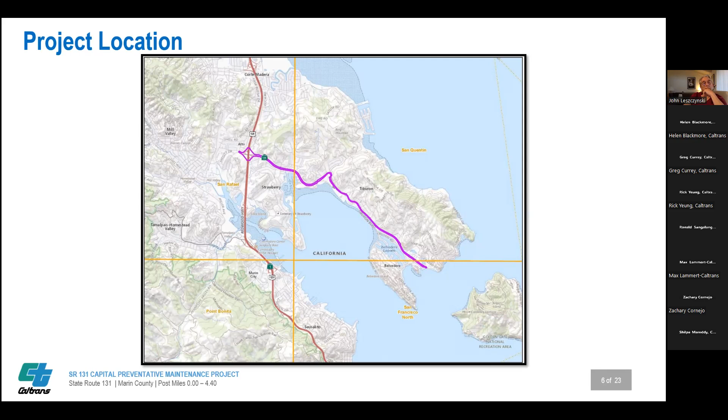Thank you, Brooklyn. Good evening, everyone. I am Saman Sohelifard, the project manager for this project. The project would occur along Post Mile 0 to Post Mile 4.4 on State Route 131 in the town of Tiburon in Marin County. The project limits begin approximately 1,000 feet west of the US 101 interchange, extending east to the Tiburon Boulevard Main Street intersection.

The purpose of this project is to improve the serviceability and ride quality of SR 131 and restore existing drainage systems. In addition, the project would enhance complete street and support active modes of transportation by improving bicycle access throughout the project footprint. The photo on this slide depicts the existing conditions of SR 131 west of the San Rafael Avenue intersection.

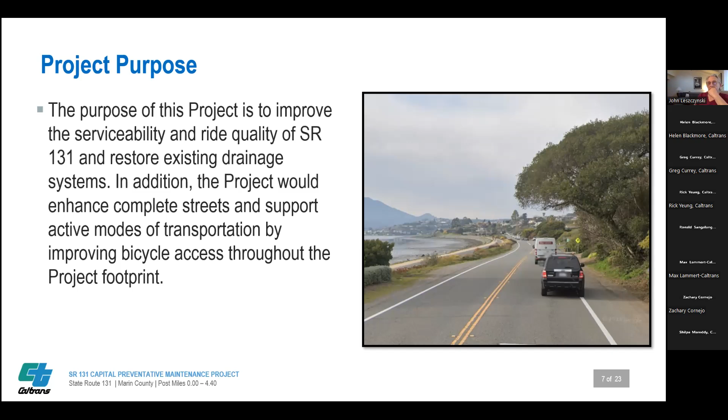The project is needed to address existing roadway deterioration and bring roadway elements up to existing standards. This project is needed to upgrade existing curb ramps along SR 131 to current Americans with Disabilities Act standards and to install new curb ramps where there are none.

Roadway components including guardrails, roadway signage, pavement delineation, drainage facilities, and electrical systems will also require upgrades and replacement to satisfy street and highway code requirements.

The project is also needed to bridge gaps in the existing transportation network by improving bicycle access in accordance with the Caltrans District 4 Bike Plan, Marin County Unincorporated Area Bicycle and Pedestrian Master Plan, the Town of Tiburon's Bicycle and Pedestrian Master Plan, and the Town of Tiburon Bike Trail Gap Study.

The photo on this slide depicts the existing conditions of the SR 131 Greenwood Cove intersection looking west. I will now hand it over to Nazeer Babakarkhial to discuss the project components and construction activity.

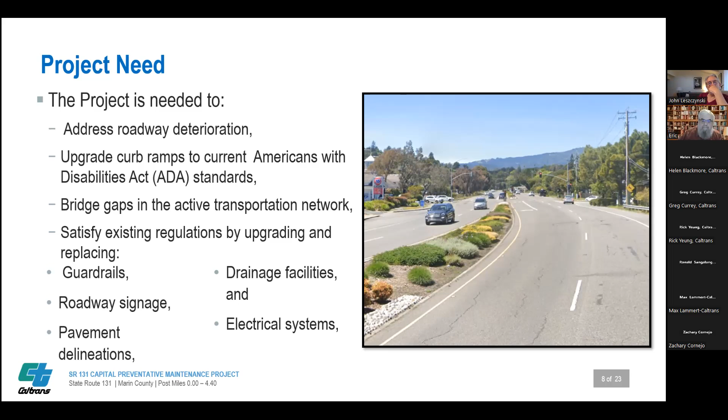Caltrans is proposing to repair approximately 4.4 miles of State Route 131. Due to the length of the State Route 131 project corridor and to aid in the discussion, the project components have been broken down into 3 project segments here and in the environmental documents.

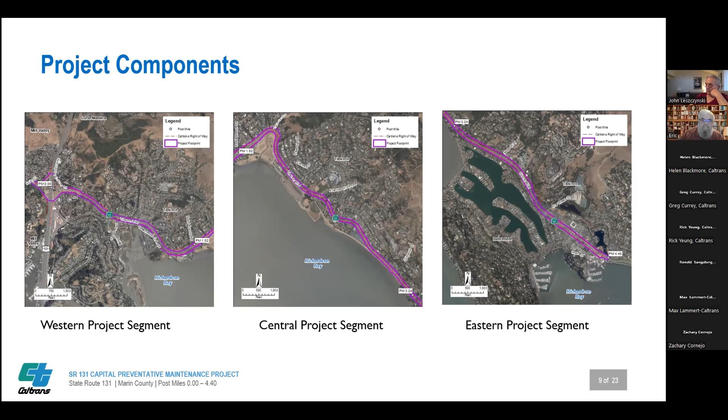The western project segment extends from Tower Drive, approximately 1,000 feet west of the US 101 interchange, to Reed Ranch Road, Post Mile 1.52. The central project segment extends from Reed Ranch Road, Post Mile 1.52, to San Rafael Avenue, Post Mile 3.24. The eastern project segment extends from San Rafael Avenue, Post Mile 3.24, to the Tiburon Boulevard Main Street intersection, Post Mile 4.4. The total project footprint is approximately 17.24 acres.

While we go into details on what project components are unique to each of the 3 project segments that we have described, we will first review project components that are common throughout the State Route 131 project corridor.

Project components that would occur throughout the State Route 131 project corridor include the rehabilitation and addition of new pavement, upgrading of curb ramps to ADA standards, upgrading of guardrails to current standards, upgrades to signage throughout the corridor, improvement of pavement delineation, and modification of electrical systems.

The project components are discussed in detail in Chapter 2, project description, of the published environmental document. In addition, a visual depiction of all project components along the project corridor are presented in Appendix A figures of the published ISND.

Project components that are unique to each of the three project segments are depicted in the slides. The western project segment, from Tower Drive to Reed Ranch Road, would include the construction of Class 1, Class 2, and Class 4 bikeway, modification to the State Route 131 Strawberry Drive intersection, modification to existing curb ramps, and a pedestrian refuge island.

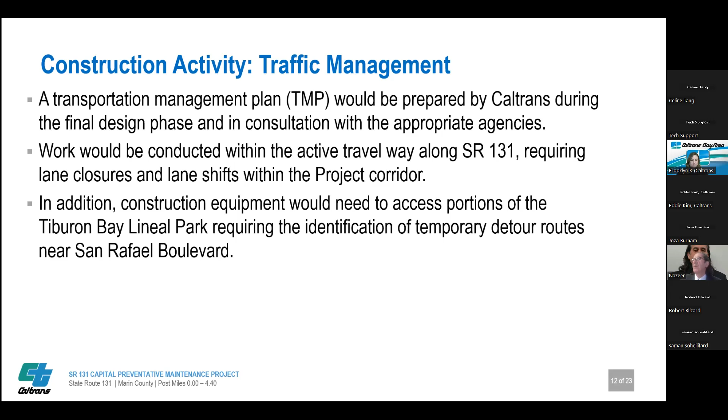TMP would include public information and press releases to notify and inform motorists, local businesses, community groups, local entities, emergency services providers, and local officials of the upcoming closure and the work involved. Additionally, optional detour routes for the Tiburon linear trail would be offered to the traveling public for a portion near San Rafael Avenue.

During construction, pavement rehabilitation would be performed in stages to keep travel lanes open to the public and minimize traffic disruption. Partial lane and shoulder closures are expected as part of project construction; however, no detours or signalized traffic control are anticipated.

To protect construction workers and the traveling public, traffic control would be in place while construction activities are underway. The detailed TMP discussed previously would be developed during the design phase to maintain access along State Route 131.

The project is anticipated to involve night work, including paving, striping, and curb replacement work. Weekend work would potentially occur. Construction staging plans would be developed during the final design phase.

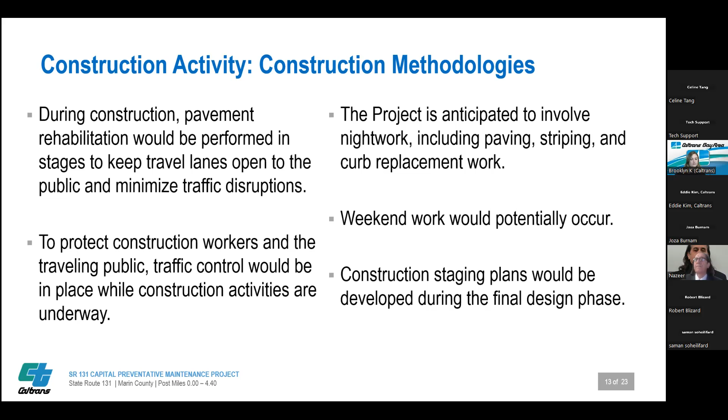Prior to the beginning of construction-related activities, construction area signs and environmentally sensitive area, or ESA, fencing and temporary debris catchment systems, construction staging areas, and elements of the traffic management plan would be installed.

The temporary debris catchment systems would be installed to contain and prevent demolition and construction debris from entering any waterways within or adjacent to the project footprint. They include, but are not limited to, attachments on construction equipment, plastic bibs, plastic sheeting, liners, tarps, netting, drip pans, and absorbent materials.

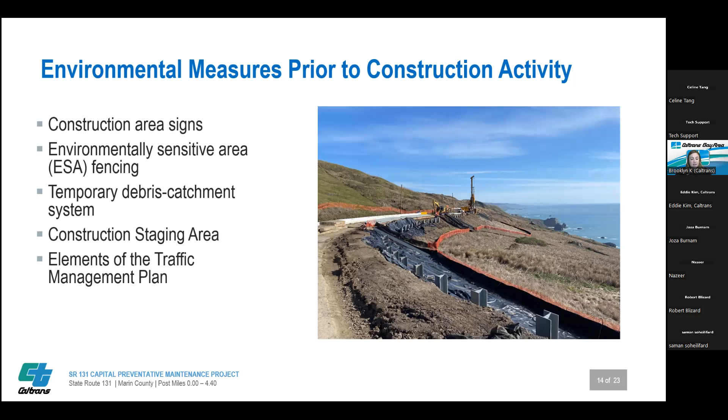Project features, or PFs, are measures incorporated into Caltrans projects to reduce environmental impacts. They can include both design components of the project and standardized measures that are applied to most, if not all, Caltrans projects. Avoidance and/or minimization measures, or AMMs, are additional measures to avoid or minimize a project's environmental impacts, but are more specifically tailored to a given project's particular impacts.

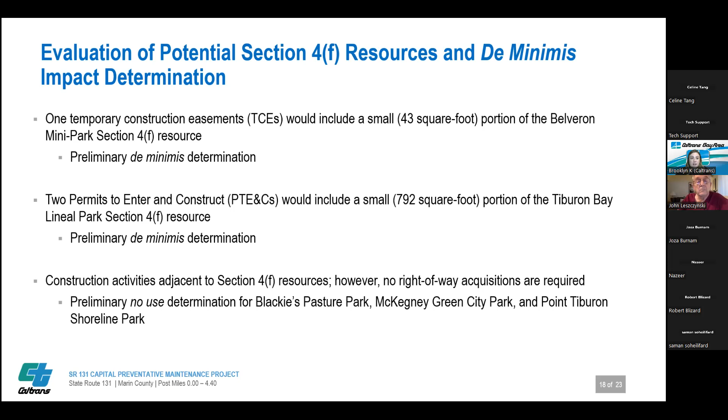The final ISND is expected to be available to the public by December 29th, 2023. If the project is approved, the design phase will begin next and is expected to be completed by summer of 2025. The project will then be advertised for contractor bidding. Afterwards, construction is expected to begin in 2026 and to be completed by spring of 2027.

The document can also be read in person at the Belvedere Tiburon Library, Mill Valley Public Library, or Civic Center Library. Additionally, if you'd like to rewatch this presentation, the YouTube link to the recording will be posted on the Caltrans District 4 Environmental Document webpage as well.

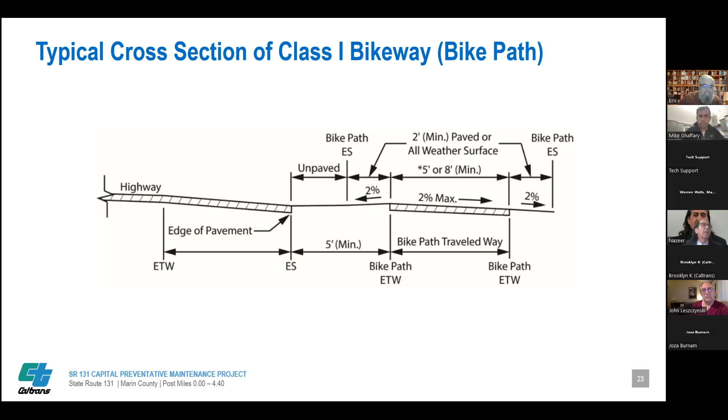So here's class 1. Class 2. Class 4. Okay, all right, I hope I answered that question. Yeah, I think Nazeer, I think you did a really good job on that. Let's go with our next person in line.

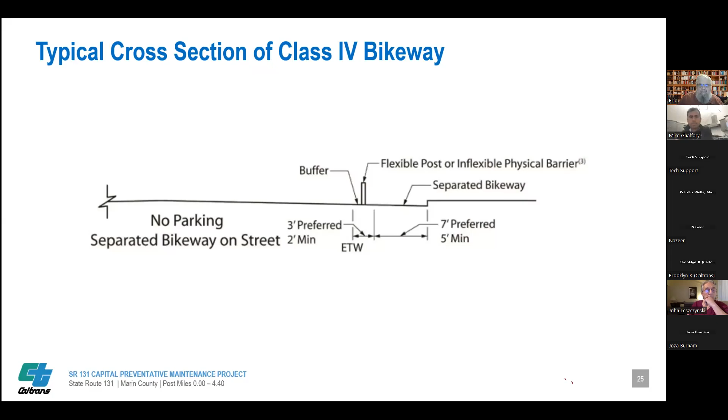Yes, thank you. My name is Eric Artman. I'm a Tiburon resident. I'm trying to figure out how much parking will be lost as a result of these bikeways. Can you indicate the total linear loss of parking for any of the area along Route 131 from the 101 intersection into Tiburon?

Okay, I think this would probably be another good question for Nazeer to answer. All right, thank you, Eric.

What we are doing in this project is taking over the shoulder. Mostly we take over the shoulder in striping for the bike lane and for all classes. I believe because the bike lane would go from Tower Drive all the way to Trestle Glen, where mostly it's shoulder, we don't have any parking except for the beginning, but we are not losing any parking space as far as I see. But again, we will see in the design phase if there are any changes.

I'm sorry, but if you're saying there's no parking between Trestle Glen and Tower Drive, you are sadly mistaken, and you haven't even driven that section of highway to see it, because there are many places there where people can parallel park. If you drive it at maybe 10 o'clock in the morning, there may be nobody parked there. But if somebody's having a party at their house, there are a lot of residences along that stretch, and there may be many people parked there at 7:30 in the evening. So I'm wondering if your environmental document or your planning has even considered the removal of parking, which means a lot to some of the residences between 101 and Trestle Glen.